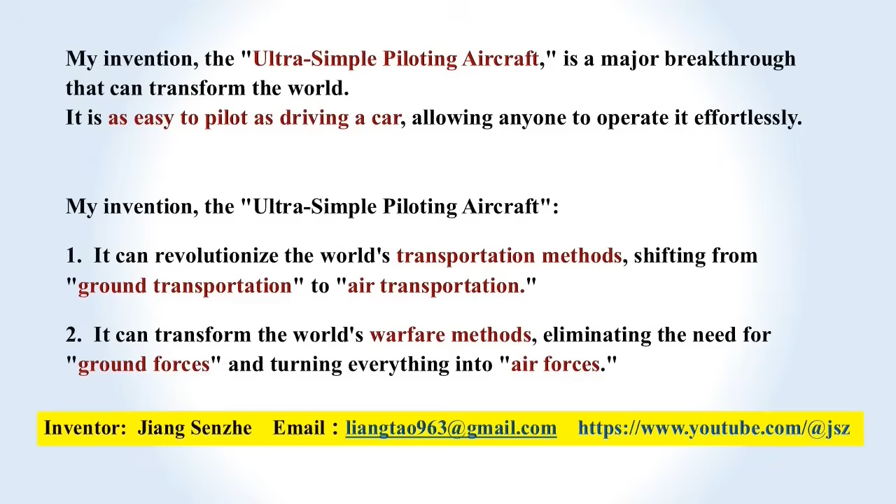My ultra-simple piloting aircraft is extremely simple to operate, just like driving a car, with only 3 controls: the steering wheel, accelerator pedal, and brake pedal.

The steering wheel controls the aircraft's left and right turns. The accelerator pedal controls the aircraft's up and down elevation.

Press the accelerator, and the aircraft ascends. Keep the accelerator steady, and the altitude remains constant. Release the accelerator, and the aircraft descends.

The brake pedal controls the brakes on the aircraft's ground wheels. This simple control method makes piloting the aircraft as easy as driving a car, making it an ultra-simple piloting aircraft that anyone can fly.

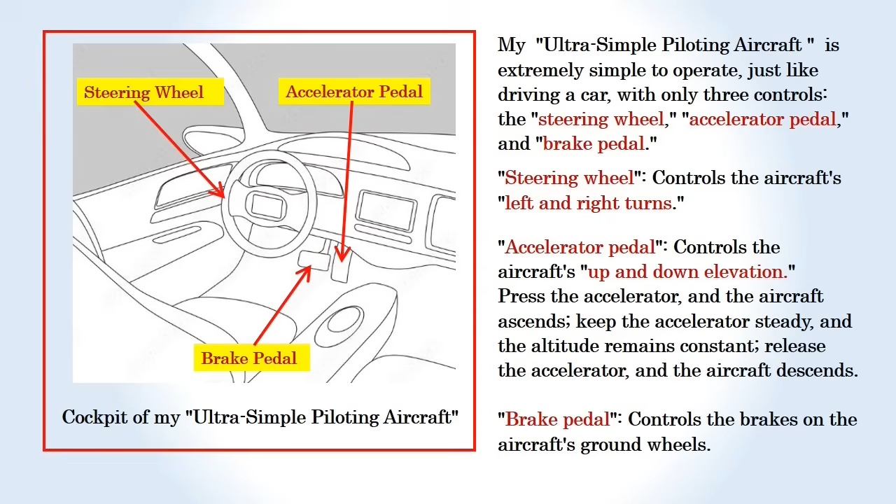This video program is divided into 3 parts.

Part 1: my invented ultra-simple piloting aircraft, which can change the world's transportation methods, shifting from ground transportation to air transportation. Part 2: my invented ultra-simple piloting aircraft, which can change the world's warfare methods, eliminating the need for ground forces and turning everything into air forces. Part 3: an introduction to the principles of my invented ultra-simple piloting aircraft.

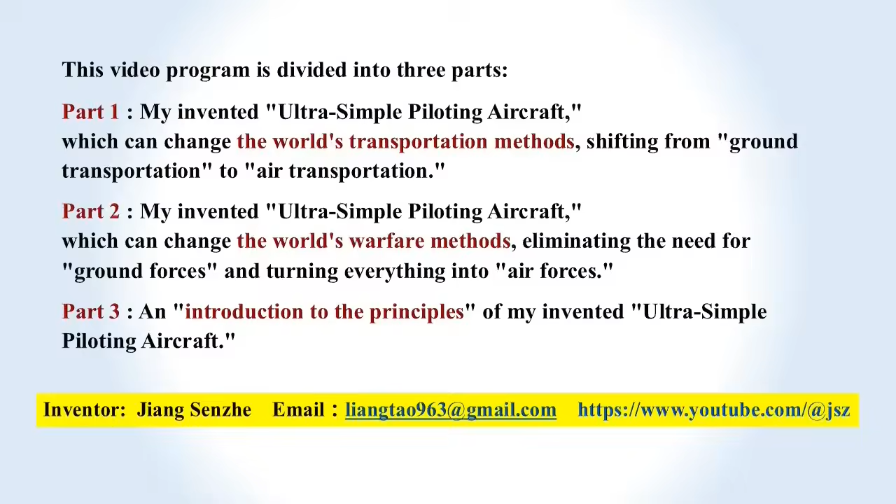First part: my invented ultra-simple piloting aircraft can change the world's transportation methods, shifting from ground transportation to air transportation.

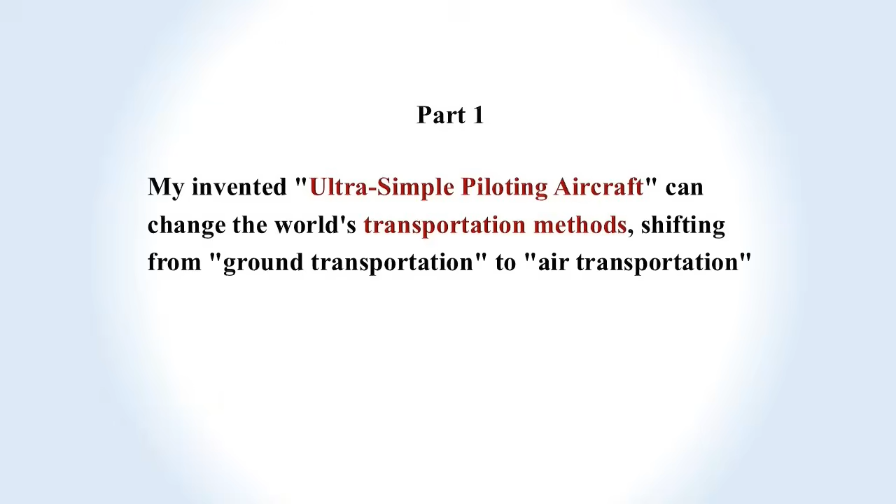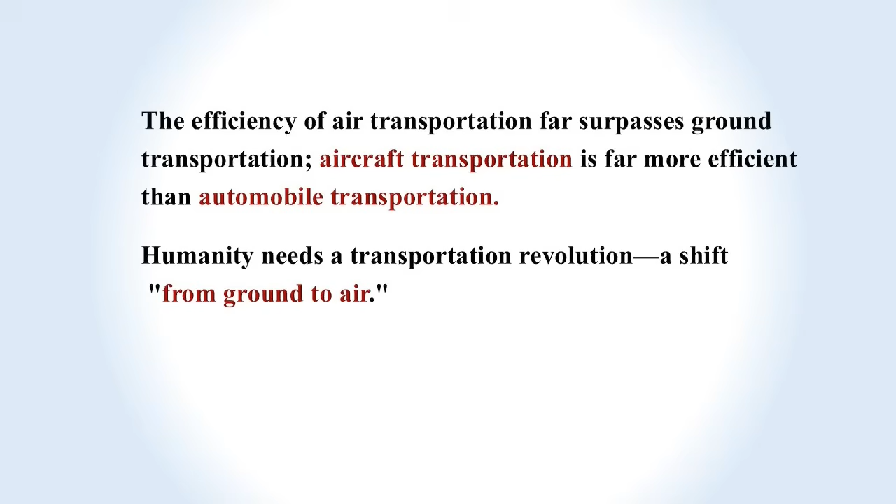The efficiency of air transportation far surpasses ground transportation. Aircraft transportation is far more efficient than automobile transportation. Humanity needs a transportation revolution, a shift from ground to air.

First, let's discuss the 6 major drawbacks of ground transportation. One: the infrastructure costs for ground roads are extremely high. Building a road connecting 2 cities may require bridges over rivers or tunnels through mountains, resulting in very high construction costs and long timelines.

Two: maintenance costs for ground roads are high. Roads aren't just built and forgotten, they require frequent repairs, which incur significant expenses.

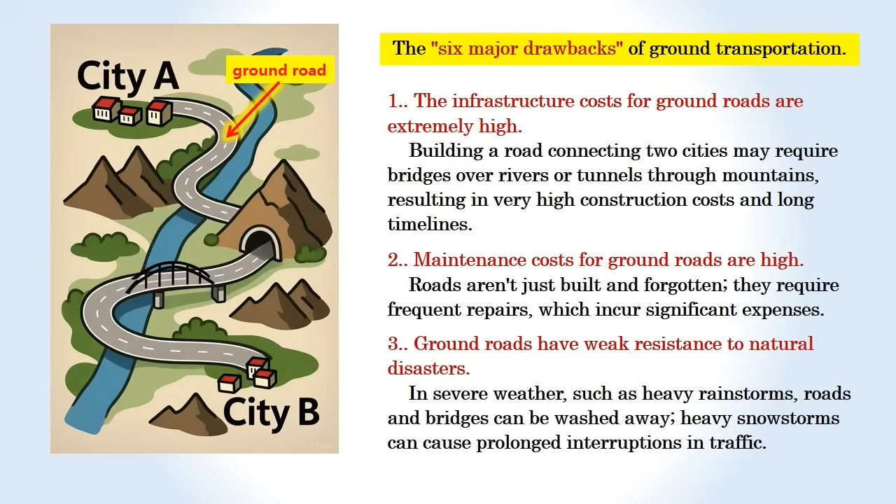Three: ground roads have weak resistance to natural disasters. In severe weather, such as heavy rainstorms, roads and bridges can be washed away. Heavy snowstorms can cause prolonged interruptions in traffic.

Four: ground traffic requires complex traffic signal systems. Ground traffic operates in one-dimensional space, where vehicles can only move forward and backward along roads, not freely left and right, let alone up and down.

At intersections in this one-dimensional space, complex traffic signals must halt vehicles from one direction temporarily. These signals force vehicles to stop frequently, greatly reducing travel speeds and increasing unnecessary fuel consumption. Additionally, the high cost of traffic signal systems further raises ground transportation expenses.

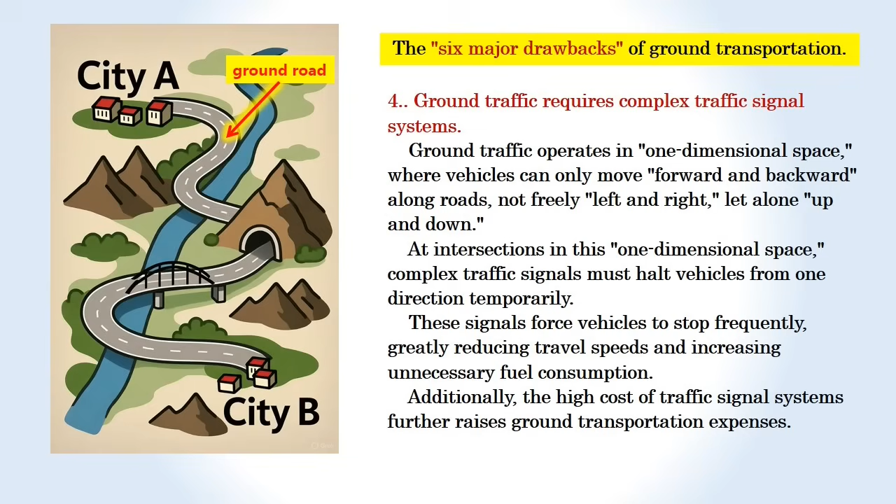Five: ground roads are prone to traffic jams, leading to uncertainty in transportation. Roads often experience long jams for various reasons, creating uncertainty in ground traffic and making it impossible to arrive precisely on schedule. Prolonged jams also cause significant economic losses.

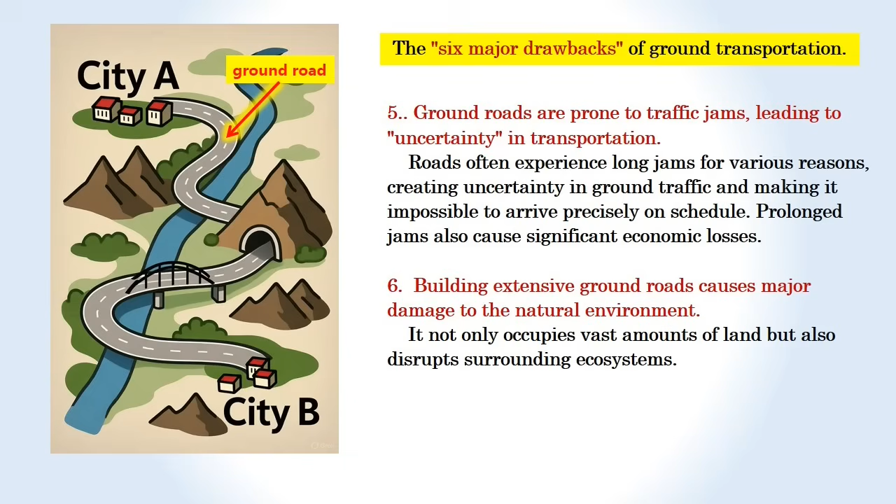Six: building extensive ground roads causes major damage to the natural environment. It not only occupies vast amounts of land but also disrupts surrounding ecosystems.

Air transportation can overcome these 6 major drawbacks of ground transportation. One: no need for massive road systems. Connecting 2 cities via air doesn't require roads, just build a few airports in each city, drastically reducing construction costs.

Two: no road maintenance fees. Air routes made of natural air require no repairs, only airports need maintenance, significantly lowering costs.

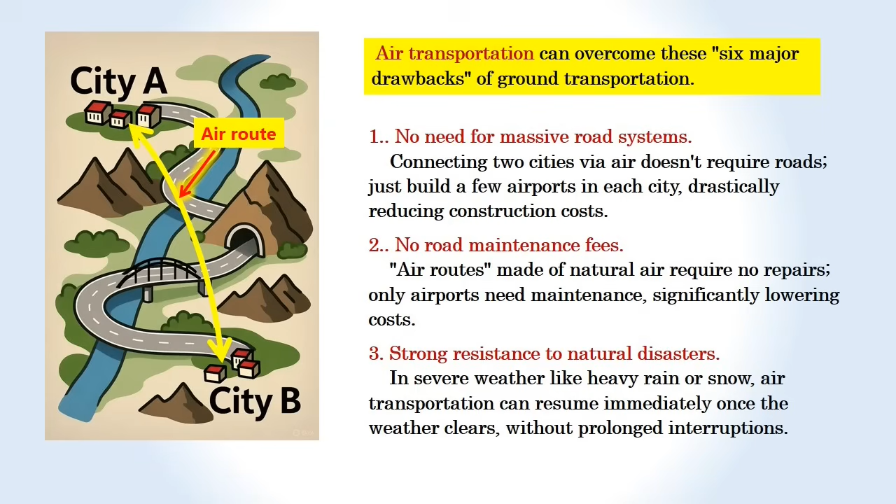Three: strong resistance to natural disasters. In severe weather like heavy rain or snow, air transportation can resume immediately once the weather clears, without prolonged interruptions.

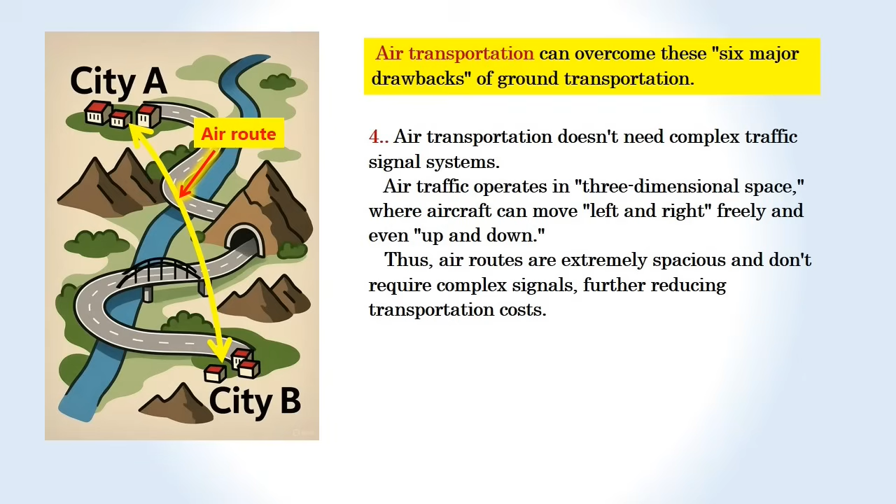Four: air transportation doesn't need complex traffic signal systems. Air traffic operates in 3-dimensional space, where aircraft can move left and right freely and even up and down. Thus, air routes are extremely spacious and don't require complex signals, further reducing transportation costs.

Five: no air route congestion, leading to high certainty in transportation. Without blockages, air traffic is highly predictable, allowing precise on-time arrivals.

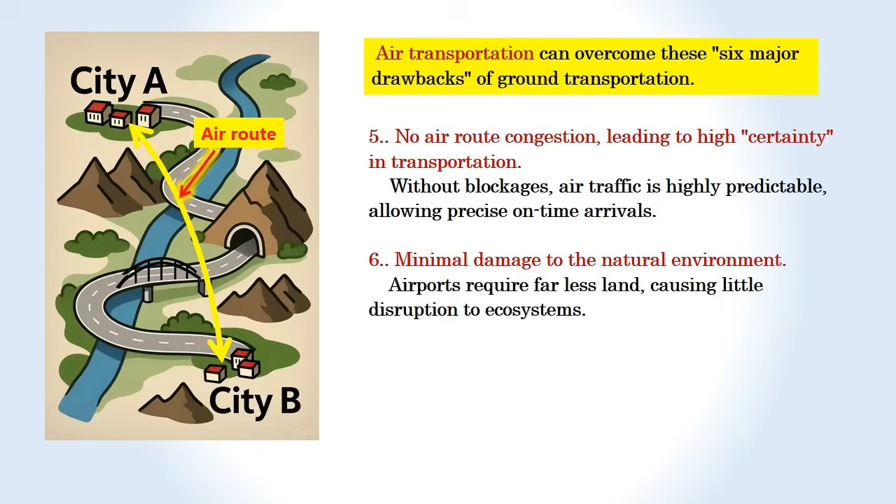Six: minimal damage to the natural environment. Airports require far less land, causing little disruption to ecosystems.

First advantage of air transportation: it greatly reduces transportation costs compared to ground transportation. Many people think aircraft consume more fuel than cars, but this overlooks the hidden costs of ground transportation, which include not just vehicle fuel but also road construction. Roads are extremely expensive, especially with tunnels and bridges, and they also require costly traffic control systems plus high maintenance for both.

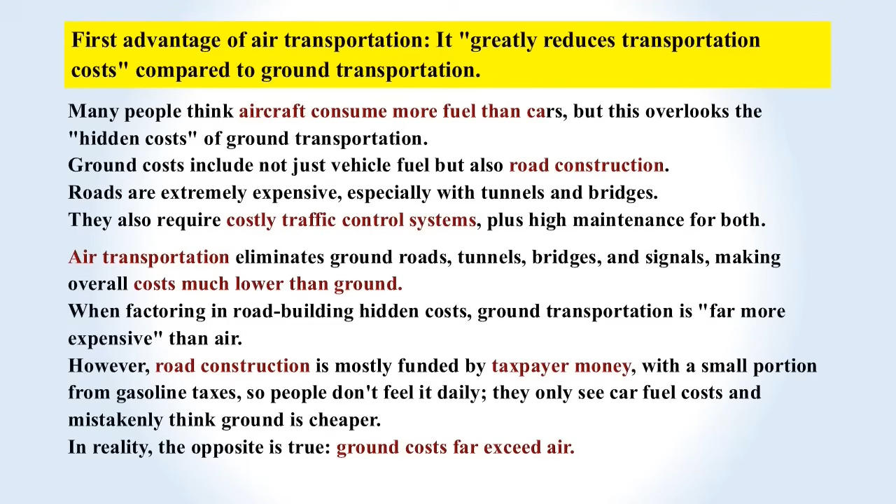Air transportation eliminates ground roads, tunnels, bridges, and signals, making overall costs much lower than ground. When factoring in road building hidden costs, ground transportation is far more expensive than air. However, road construction is mostly funded by taxpayer money, with a small portion from gasoline taxes, so people don't feel it daily, they only see car fuel costs and mistakenly think ground is cheaper. In reality, the opposite is true, ground costs far exceed air.

Second advantage of air transportation: it is faster than ground. First reason for air's speed: ground roads are winding, while air routes are straight. Ground roads between cities often curve to avoid obstacles, lengthening distances. Air routes have no obstacles, so they can be straight, shortening distances and naturally increasing speed.

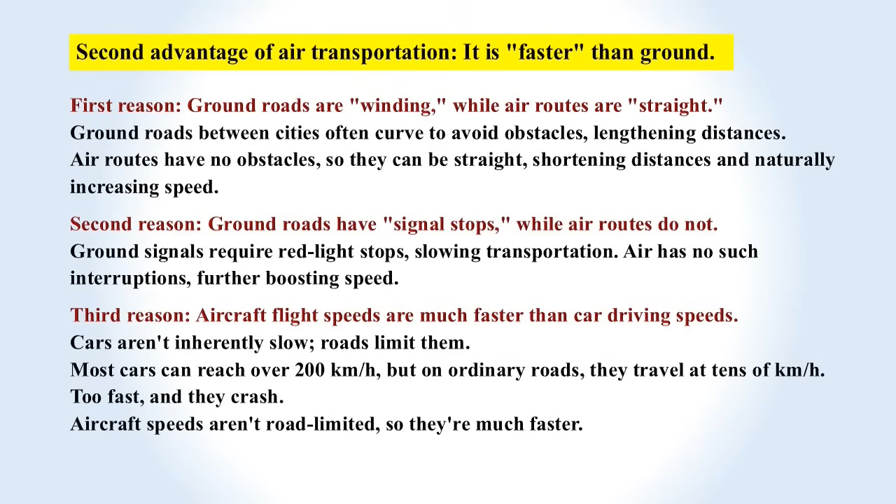Second reason, ground roads have signal stops, while air routes do not. Ground signals require red light stops, slowing transportation. Air has no such interruptions, further boosting speed. Third reason, aircraft flight speeds are much faster than car driving speeds. Cars aren't inherently slow, roads limit them. Most cars can reach over 200 km/h, but on ordinary roads they travel at tens of km/h, too fast and they crash. Aircraft speeds aren't road limited, so they're much faster.

Third advantage of air transportation: it is more precise than ground. Modern society demands increasing precision in transportation, like in express delivery. Ground is affected by signals and jams, making precision hard. Air has no signals or jams, enabling easy precision.

Fourth advantage, air has stronger disaster resistance than ground. Ground has weak resistance to disasters: heavy rain washes away roads, snow causes long interruptions. Air resumes quickly after weather clears, without prolonged halts.

Fifth advantage, air causes less environmental damage than ground. Ground systems cause major ecosystem harm, occupying vast land and inflicting permanent damage. Air needs no massive roads, airports use little land, minimizing impact.

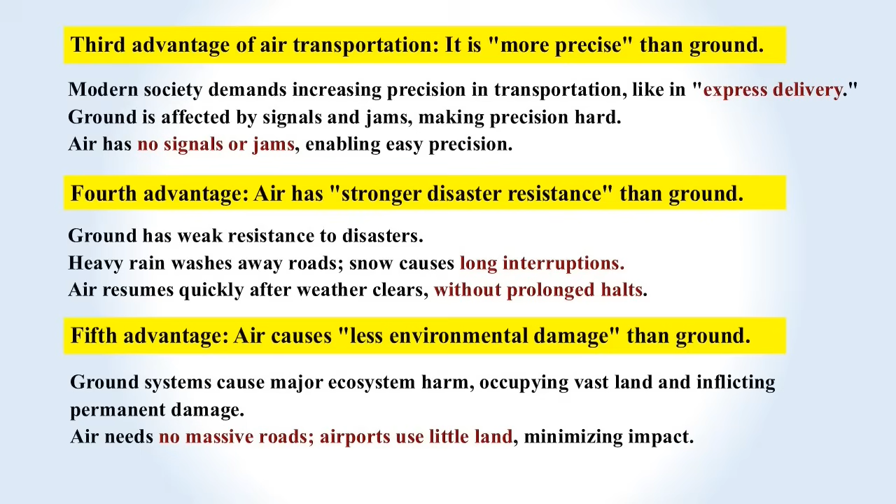Finally, summarizing the advantages of air transportation: 1. Air greatly reduces transportation costs compared to ground. 2. Air is faster than ground. 3. Air is more precise than ground. 4. Air has stronger disaster resistance than ground. 5. Air causes less environmental damage than ground. Therefore, air transportation efficiency far surpasses ground, aircraft efficiency far exceeds automobiles. Humanity needs a transportation revolution, a shift from ground to air.

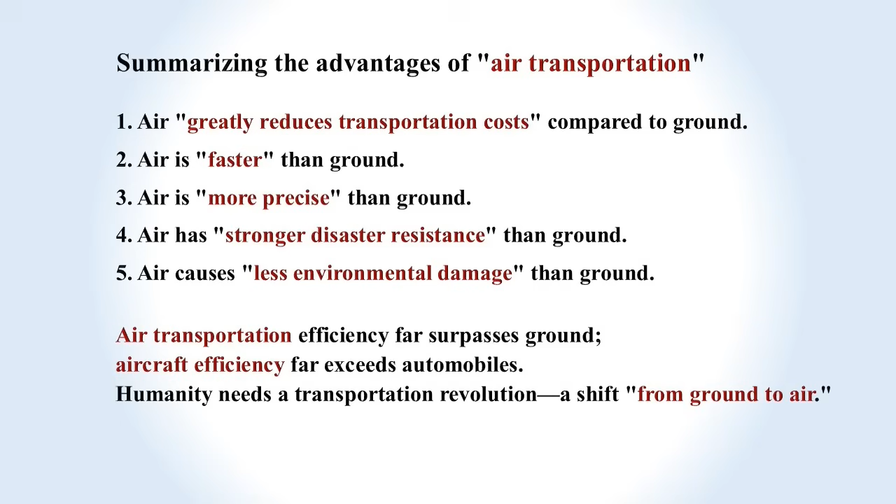The biggest obstacle to widespread air transportation is that current aircraft are very complex to pilot, requiring specialized pilot training. If piloting were as simple as driving a car, making it so anyone can fly, widespread adoption would be much easier. My invented ultra-simple piloting aircraft is extremely simple to pilot, anyone can fly. It can enable widespread air transportation and achieve the revolution from ground to air.

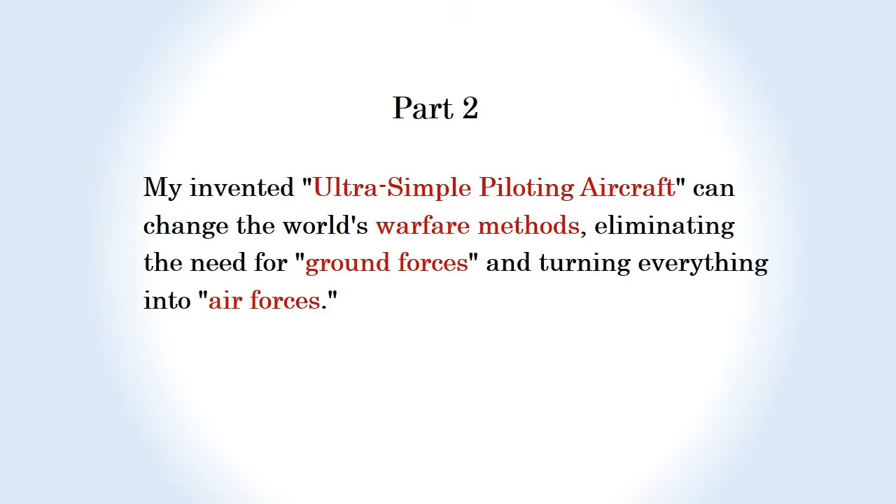Second part: my invented ultra-simple piloting aircraft can change the world's warfare methods, eliminating the need for ground forces and turning everything into air forces. This is an epoch-making invention that can transform global warfare. It is as easy to pilot as driving a car, allowing anyone to operate it effortlessly. Thus, all military soldiers can become pilots, ground forces will disappear, and everything will become air forces.

As early as World War II, air weapons proved more effective than ground ones; ground weapons were no match for air. In the Russia-Ukraine war, tanks on both sides were mostly destroyed not by opposing tanks but by aerial drones. To counter drone attacks, Russia invented the Tsar-Mangal tank, wrapping tanks in iron sheets or nets so drones explode prematurely on the outer layer, protecting the tank body. But Tsar-Mangal tanks aren't safe either, opposing drones aren't limited to one: the first destroys the net, and the second penetrates to destroy the tank.

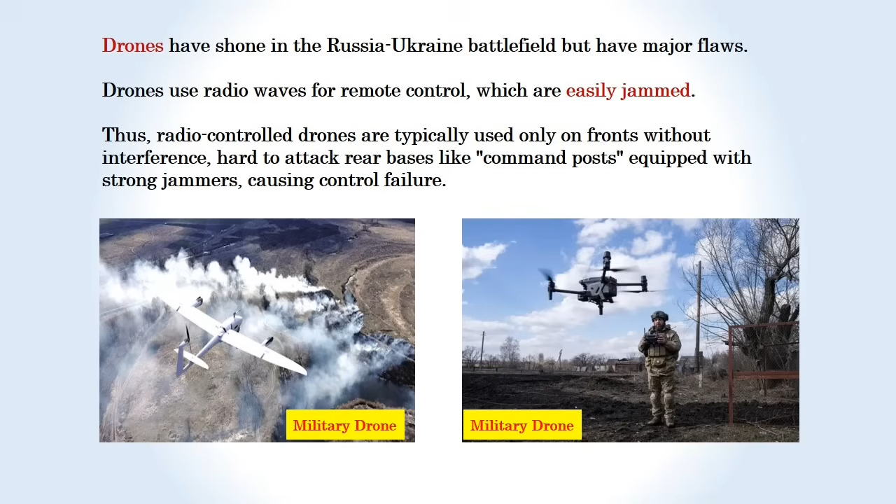Drones have shown promise on the Russia-Ukraine battlefield but have major flaws. Drones use radio waves for remote control, which are easily jammed. Thus, radio-controlled drones are typically used only on fronts without interference, and are hard to use to attack rear bases like command posts equipped with strong jammers, which cause control failure.

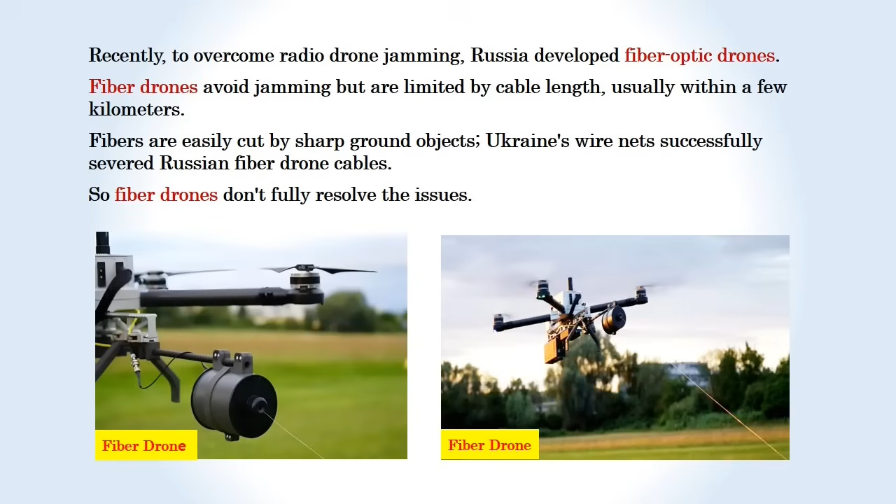Recently, to overcome radio drone jamming, Russia developed fiber optic controlled drones. Fiber drones avoid jamming but are limited by cable length, usually within a few kilometers. Fibers are easily cut by sharp ground objects. Ukraine's wire net successfully severed Russian fiber drone cables. So fiber drones don't fully resolve the issues.

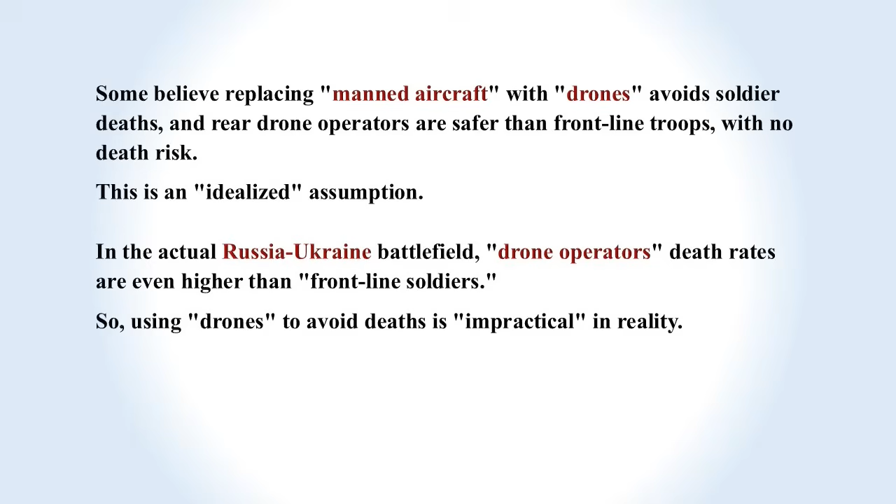Some believe replacing manned aircraft with drones avoids soldier deaths, since rear drone operators are safer than front-line troops, with no death risk. This is an idealized assumption. In the actual Russia-Ukraine battlefield, drone operators' death rates are even higher than front-line soldiers. So using drones to avoid deaths is impractical in reality.

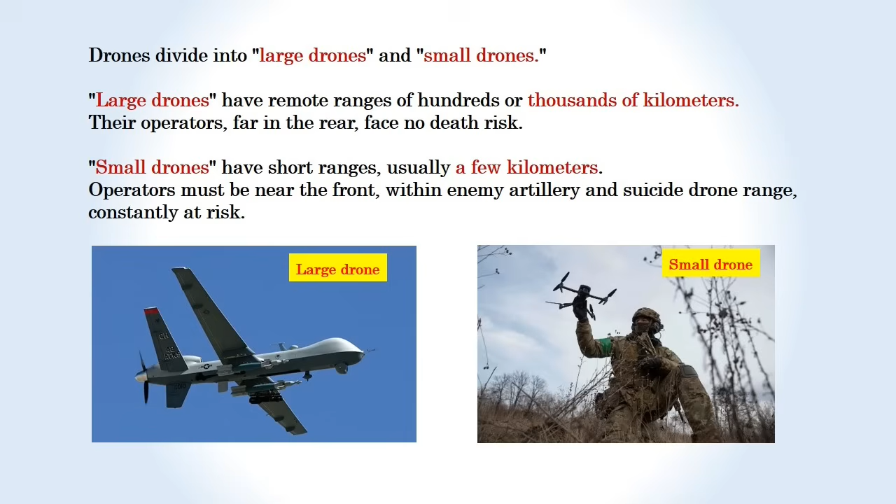Drones divide into large drones and small drones. Large drones have remote ranges of hundreds or thousands of kilometers, and their operators, far in the rear, face no death risk. Small drones have short ranges, usually a few kilometers. Operators must be near the front, within enemy artillery and suicide drone range, constantly at risk.

Large drones can be controlled from afar, safe for operators. But they're used only against foes lacking air defenses, like US MQ-9 Reapers carrying ground attack missiles, which assassinated Iranian leader Soleimani in Iraq. In real battles like Russia-Ukraine, both sides have strong air defenses. Large drones are easily radar detected and shot down by missiles, becoming sitting ducks.

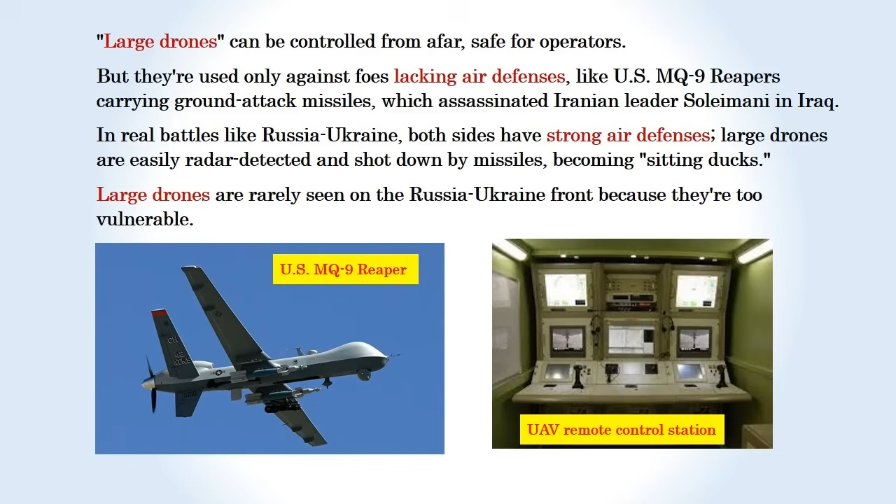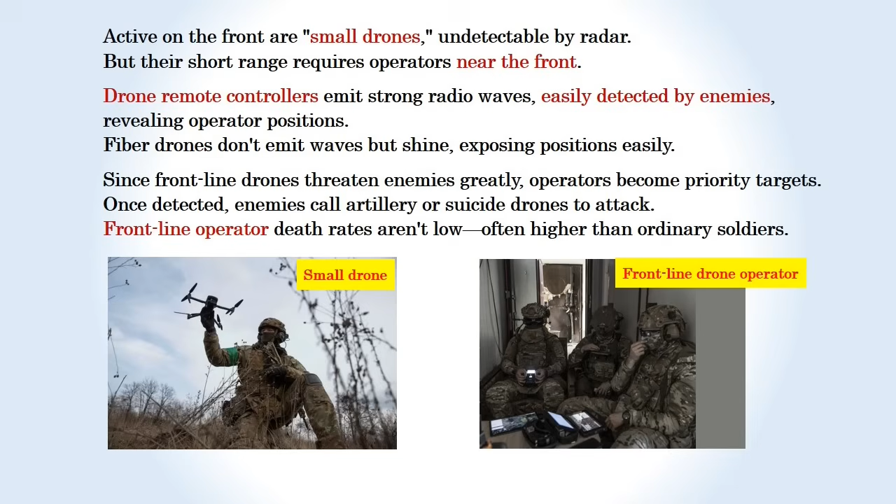Active on the front are small drones, undetectable by radar, but their short range requires operators near the front. Drone remote controllers emit strong radio waves, easily detected by enemies, revealing operator positions. Fiber drones don't emit waves but shine, exposing positions easily. Since front-line drones threaten enemies greatly, operators become priority targets. Once detected, enemies call artillery or suicide drones to attack. Front-line operator death rates aren't low, often higher than ordinary soldiers.

Thus, assuming drones avoid deaths is impractical. The most reliable battlefield weapon remains manned aircraft. But why are manned fighters rare on the Russia-Ukraine front?

Mainly because both sides have few aircraft and can't afford losses. Ukraine has only dozens, Russia hundreds. Both have lost hundreds of tanks and armored vehicles, but with thousands in stock, they can absorb it. With few aircraft, they preserve them for critical moments.

Why so few aircraft? First, modern fighters are too complex and expensive. An F-16 costs $20 million, such costly weapons can't be mass-produced.

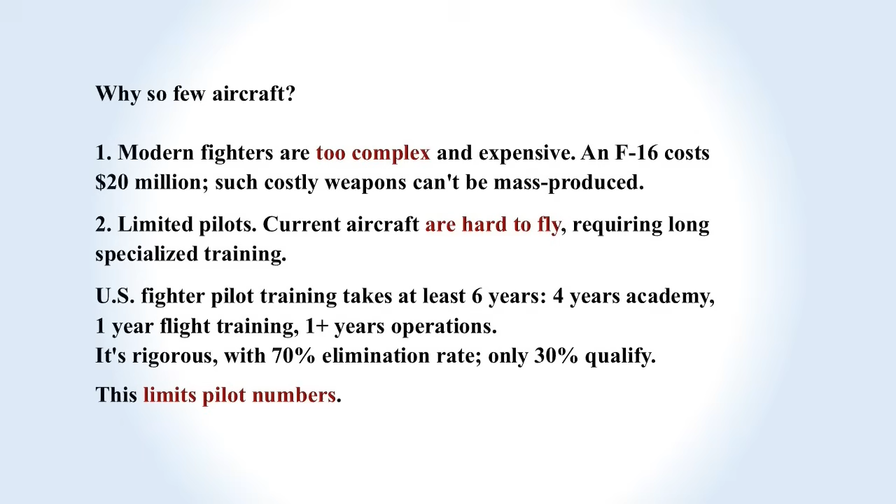Second, limited pilots. Current aircraft are hard to fly, requiring long specialized training. US fighter pilot training takes at least 6 years: 4 years academy, 1 year flight training, 1+ years operations. It's rigorous, with a 70% elimination rate, only 30% qualify. This limits pilot numbers.

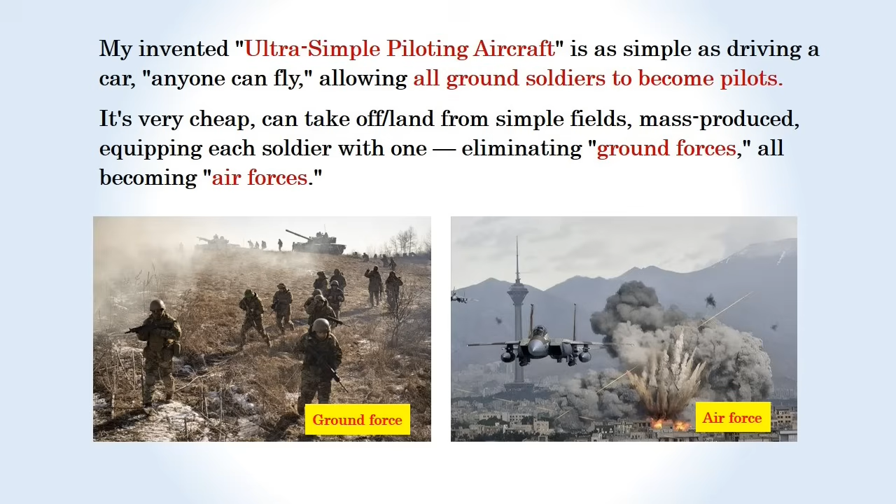My invented ultra-simple piloting aircraft is as simple as driving a car. Anyone can fly it, allowing all ground soldiers to become pilots. It's very cheap, can take off and land from simple fields, mass-produced, equipping each soldier with one, eliminating ground forces, all becoming air forces.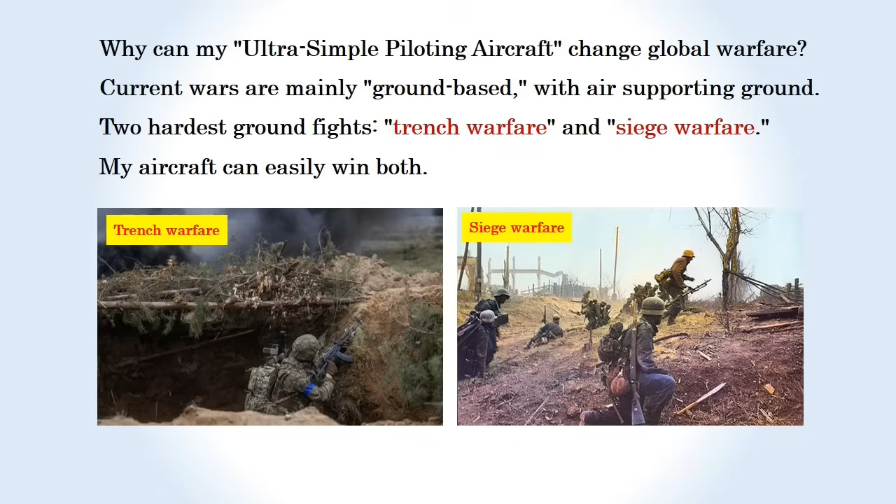Why can my ultra-simple piloting aircraft change global warfare? Current wars are mainly ground-based, with air supporting ground. The two hardest ground fights are trench warfare and siege warfare. My aircraft can easily win both.

This Russia-Ukraine photo shows typical trench warfare: a central trench, surrounded by craters blasted by enemy shells. Defenders hide in trenches, surrounded by mines. When enemies approach, they fire from trenches to repel them. Attackers first bombard with artillery to weaken defenses, then lead with tanks, infantry following, to charge and capture.

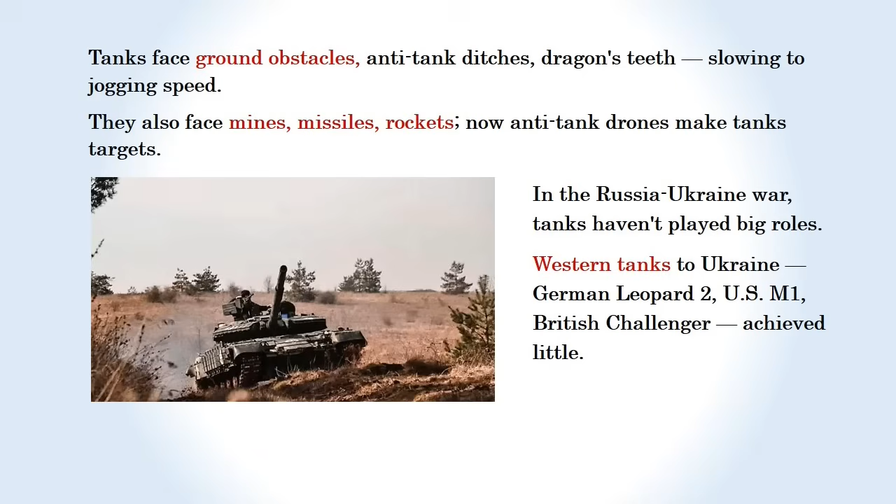Tanks face ground obstacles, anti-tank ditches, dragon's teeth, slowing to jogging speed. They also face mines, missiles, rockets, and now anti-tank drones make tanks targets. In the Russia-Ukraine war, tanks haven't played big roles. Western tanks sent to Ukraine, like the German Leopard 2, US M1, and British Challenger, achieved little.

My ultra-simple piloting aircraft can easily win trench warfare. Send hundreds of soldiers in hundreds of aircraft to attack trench enemies. Ground obstacles, ditches, teeth, mines, all become useless. Aircraft speed quickly reaches overhead, dropping bombs into trenches.

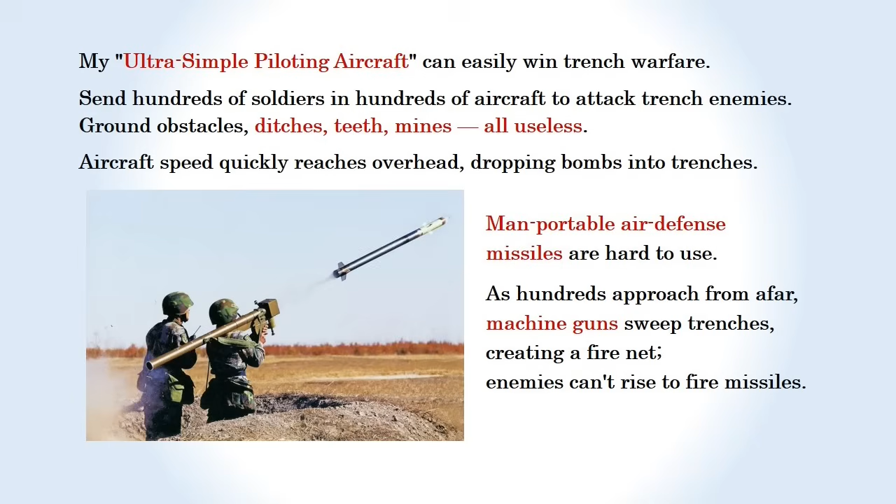Man-portable air defense missiles are hard to use as hundreds of aircraft approach from afar. Machine guns sweep trenches, creating a fire net. Enemies can't rise to fire missiles.

In summary, my ultra-simple piloting aircraft can easily win trench warfare.

My ultra-simple piloting aircraft can also easily win siege warfare. Capturing a defended city needs massive forces, tens to hundreds of thousands. Before, this required mass troop assembly in the rear, mobilizing from afar, then attacking.

The Russia-Ukraine war offers insights on siege warfare. This war has no large formation combat, mostly small scale, dozens to hundreds, not thousands or tens of thousands like World War II. Why? The key is that advanced long-range weapons prevent large troop assemblies.

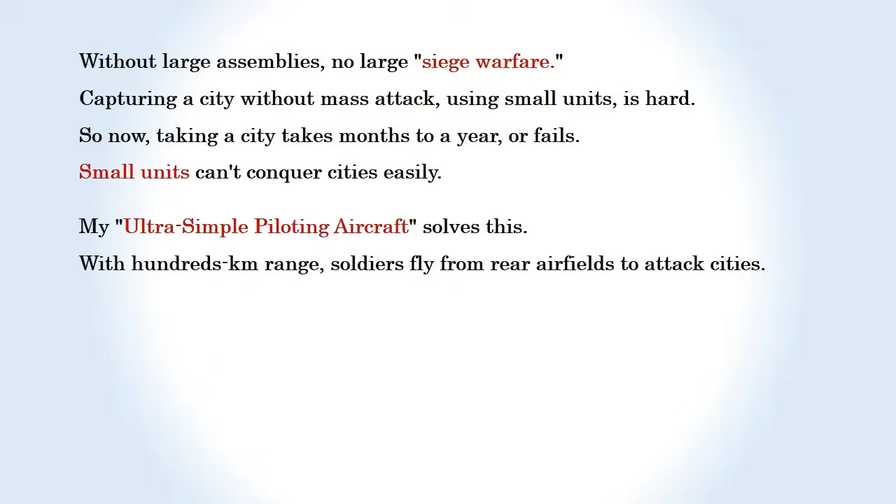For example, deploy 100,000 soldiers, each in one aircraft, attacking a city. They don't concentrate at one field, but disperse from many and jointly attack. Short takeoff and landing allows simple fields or highways.

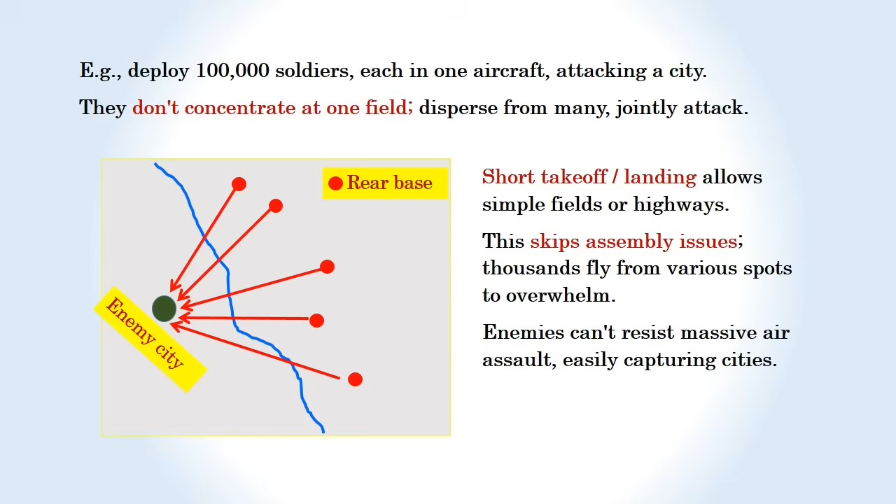This skips assembly issues, as thousands fly from various spots to overwhelm the enemy. Enemies can't resist a massive air assault, making cities easy to capture. In summary, my ultra-simple piloting aircraft can easily win siege warfare.

Most importantly, my ultra-simple piloting aircraft can eliminate ground forces, retaining only air forces. It lets air forces replace ground forces entirely, no need for ground anymore.

In the past, air forces couldn't replace ground forces because there were too few aircraft. The U.S. Air Force has approximately 5,500 manned aircraft, including 2,000 fighters. Too few to fully capture enemy positions, so a large ground army is still needed.

The U.S. Army has approximately 500,000 soldiers. Equip each with an aircraft, and it will become an air force with 500,000 aircraft. This can destroy enemy ground forces from the air, eliminating the need for ground troops, saving on tanks, armor, artillery, anti-tank weapons, and mines, reducing military spending.

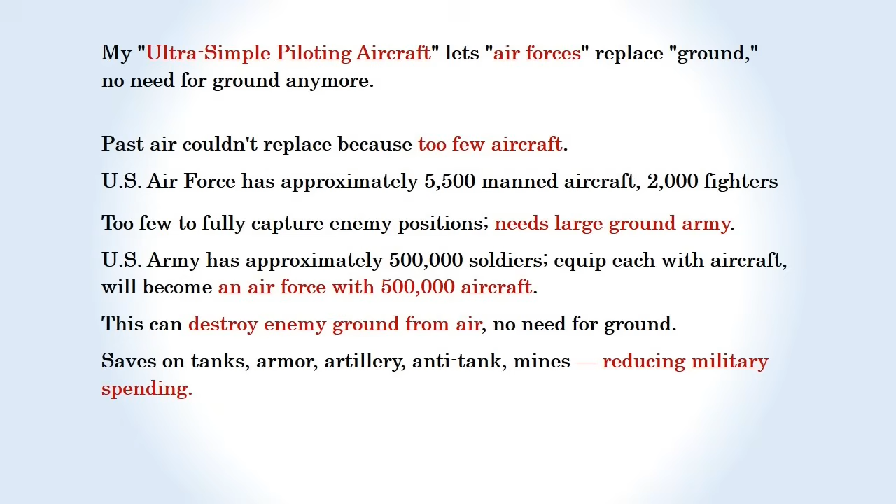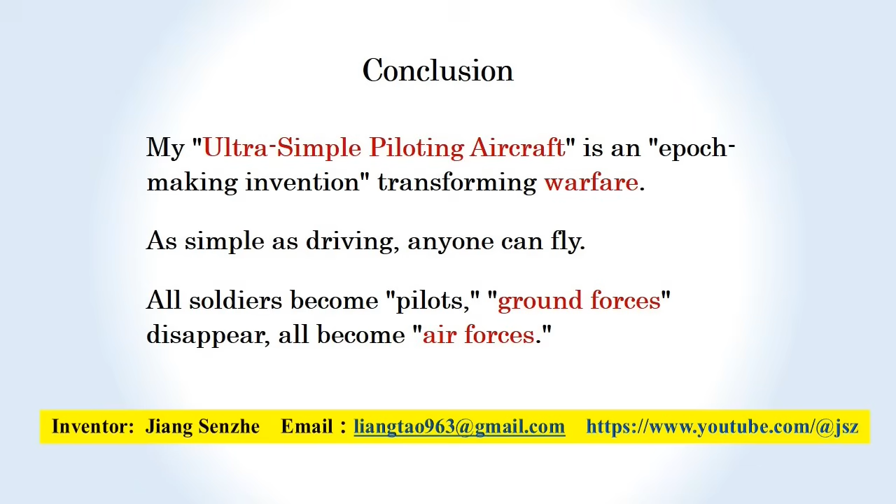In conclusion, my ultra-simple piloting aircraft is an epoch-making invention transforming warfare. As simple as driving, anyone can fly it. All soldiers become pilots, ground forces disappear, and all become air forces.

Third part: Introduction to the principles of my invented ultra-simple piloting aircraft.

Why can my ultra-simple piloting aircraft be operated by anyone? Let us first examine why current aircraft are so challenging to fly. The primary reason current aircraft are difficult to operate is the frequent need to adjust the aircraft's tilt, or pitch angle, during flight.

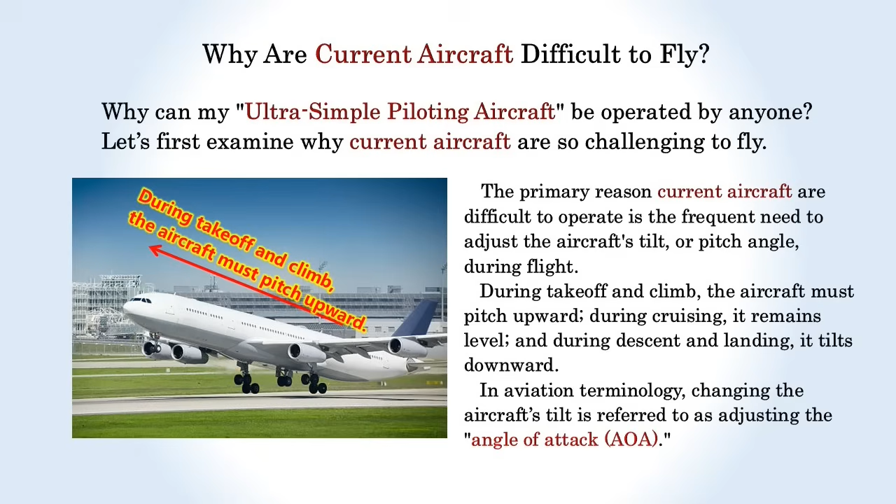During takeoff and climb, the aircraft must pitch upward; during cruising, it remains level; and during descent and landing, it tilts downward. In aviation terminology, changing the aircraft's tilt is referred to as adjusting the angle of attack.

Adjusting the angle of attack requires advanced piloting skills. If mishandled, an excessively large angle of attack can cause the aircraft to lose control and enter a stall. Once stalled, the aircraft becomes extremely difficult to control, rapidly descending and potentially leading to catastrophic crashes. Recovering from a stall requires exceptional piloting skills to restore normal flight.

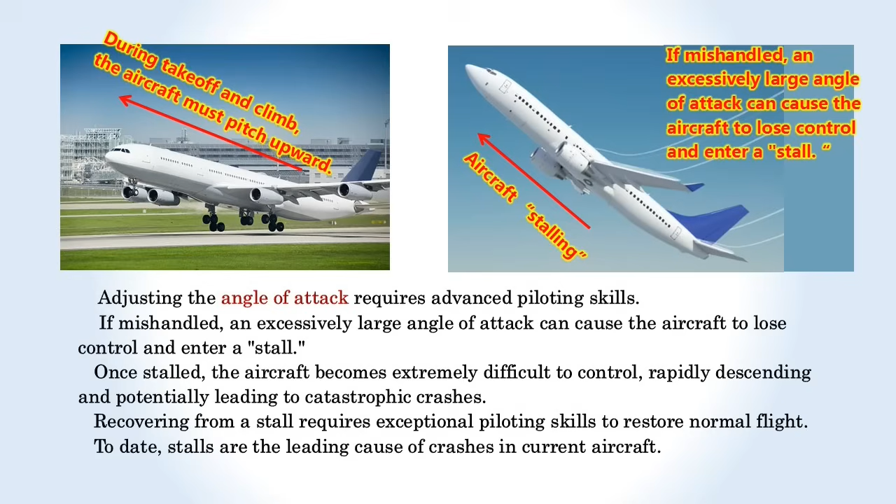To date, stalls are the leading cause of crashes in current aircraft.

Current aircraft require frequent angle of attack adjustments during takeoff, climb, cruising, descent, and landing, making operations highly complex. Precise control is needed to adjust the angle of attack, demanding rigorous training. Moreover, during these adjustments, a slight miscalculation can result in an excessive angle of attack, triggering a stall. A stall is extremely dangerous and can easily lead to a crash, resulting in loss of life.

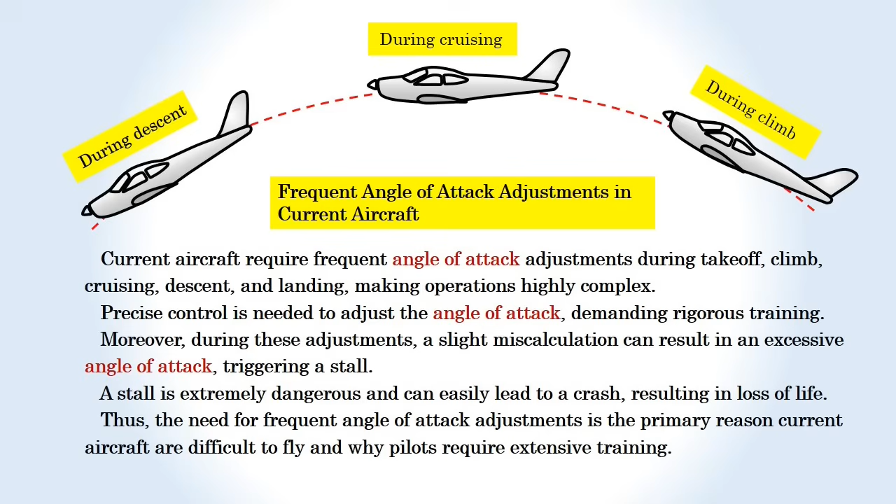Thus, the need for frequent angle of attack adjustments is the primary reason current aircraft are difficult to fly and why pilots require extensive training.

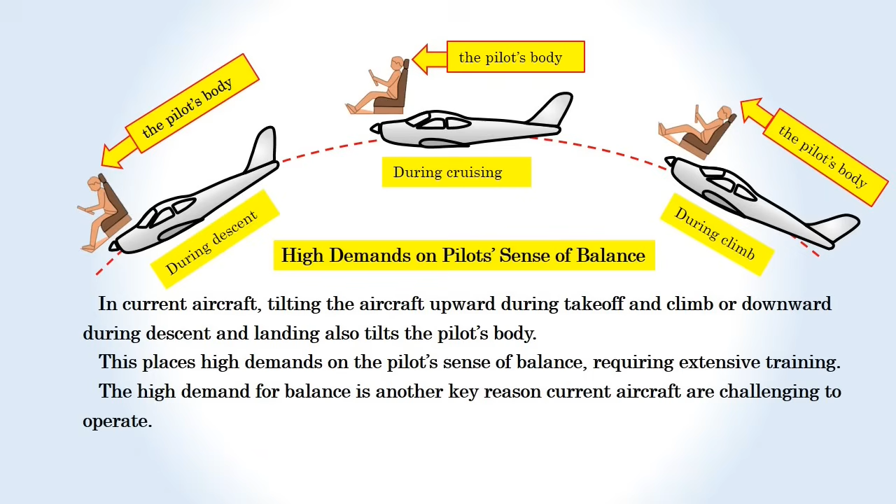In current aircraft, tilting the aircraft upward during takeoff and climb, or downward during descent and landing, also tilts the pilot's body. This places high demands on the pilot's sense of balance, requiring extensive training. The high demand for balance is another key reason current aircraft are challenging to operate.

The key feature of my new aircraft is that it has two pairs of main wings. Current aircraft have one pair of main wings located at the center of the fuselage. My new aircraft has two pairs of main wings positioned at the front and rear of the fuselage.

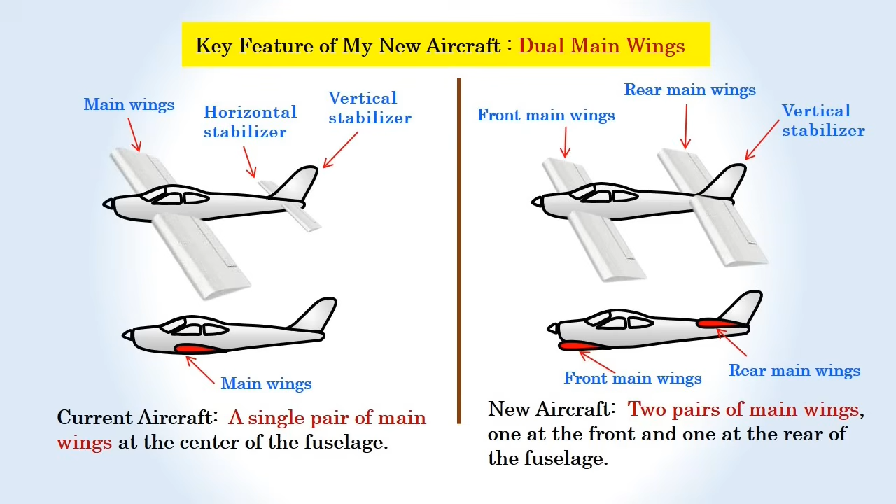Current aircraft rely on a single pair of wings for lift, similar to a unicycle, which is unstable in the fore-aft direction and difficult to control. Operating a current aircraft is as challenging as riding a unicycle, requiring special training and limiting its accessibility to a small group of trained pilots.

My new aircraft, with two pairs of wings, is akin to a bicycle, offering fore-aft stability and simple operation. Flying my aircraft is as easy as riding a bicycle, requiring no special training and accessible to most people.

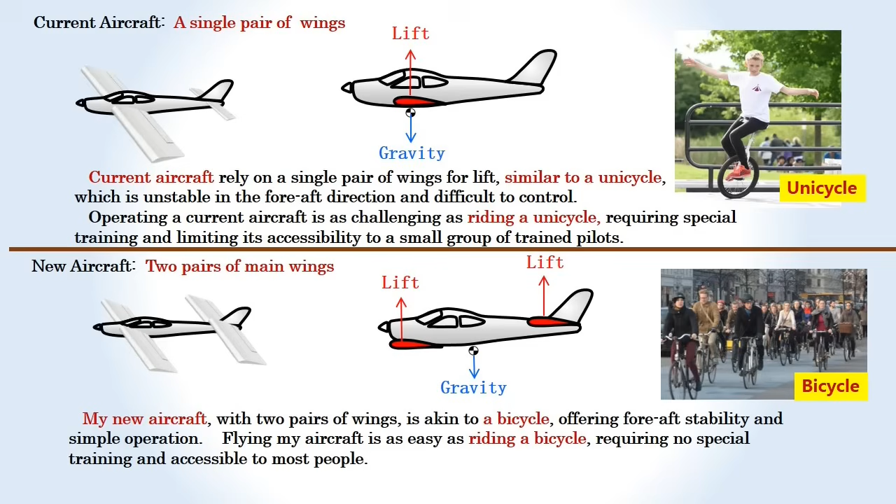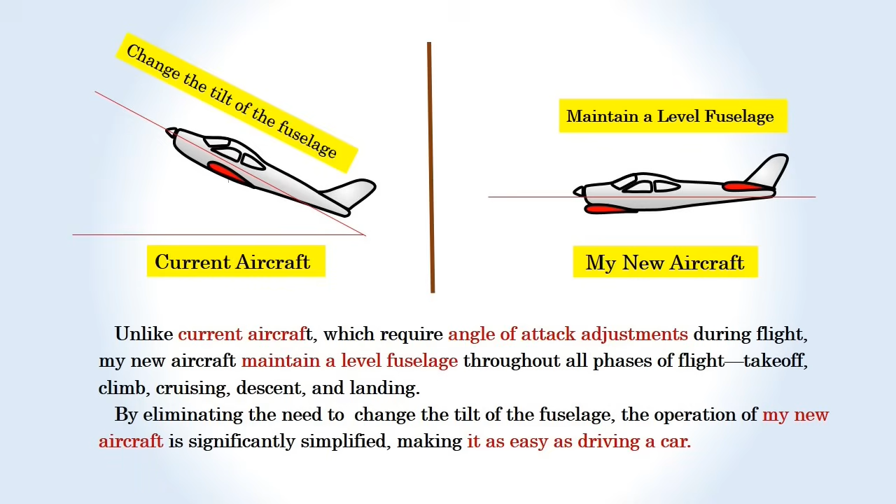Unlike current aircraft, which require angle of attack adjustments during flight, my new aircraft maintains a level fuselage throughout all phases of flight: takeoff, climb, cruising, descent, and landing. By eliminating the need to change the tilt of the fuselage, the operation of my new aircraft is significantly simplified, making it as easy as driving a car.

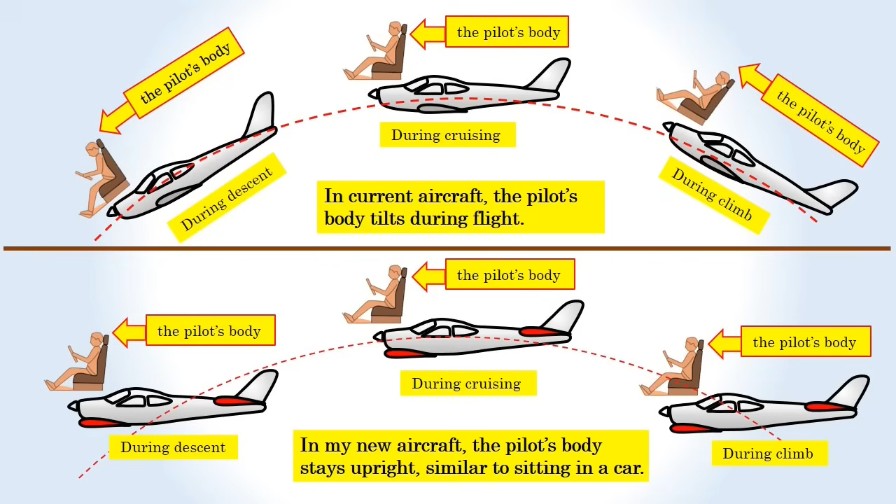In current aircraft, the pilot's body tilts during flight. In my new aircraft, the pilot's body stays upright, similar to sitting in a car.

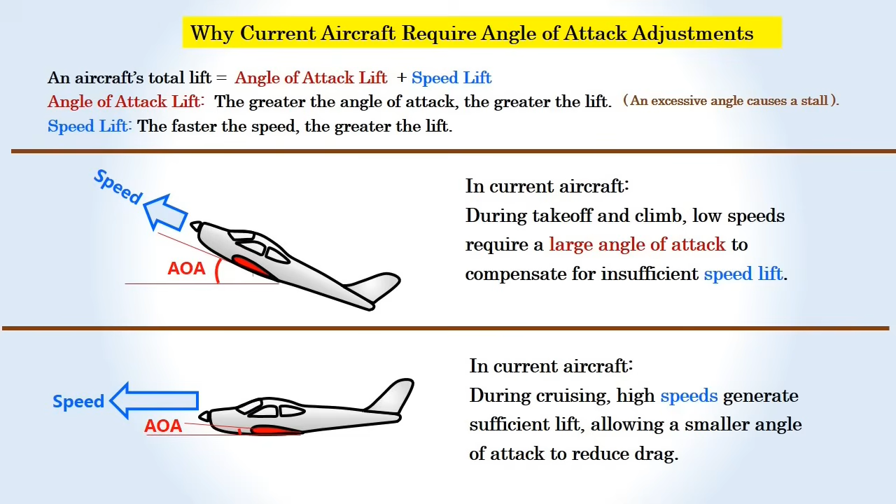Here's why current aircraft need angle changes, explained simply. The total lift of an aircraft equals angle of attack lift plus speed lift. Angle of attack lift increases as the angle of attack increases, but excessive angle of attack causes a stall. Speed lift increases as airspeed increases. In current aircraft, during takeoff and climb, low speeds require a large angle of attack to compensate for insufficient speed lift. During cruising, high speeds generate sufficient lift, allowing a smaller angle of attack to reduce drag.

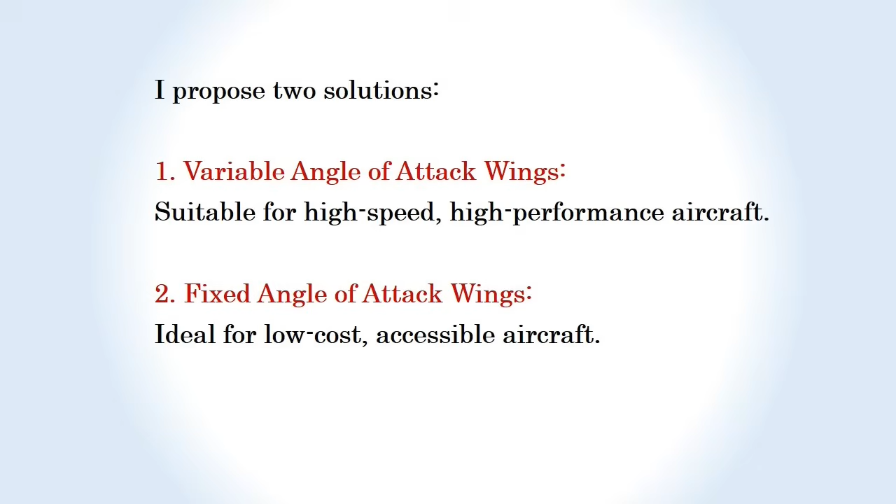My new aircraft addresses the need to alter the angle of attack in current aircraft. I propose two solutions. Solution 1: employ variable angle wings, suitable for high-speed, high-performance aircraft. Solution 2: employ fixed-angle wings, ideal for low-cost, accessible aircraft.

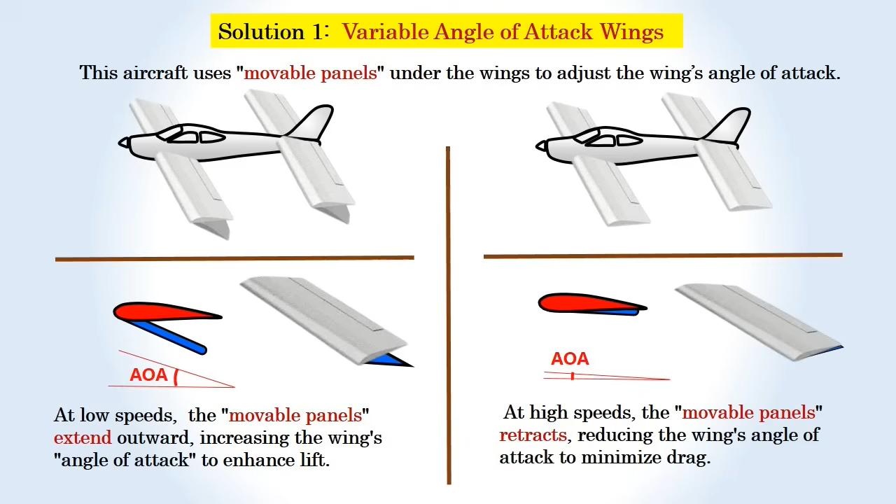This explains the principle behind a new aircraft featuring variable angle wings. This aircraft uses movable panels under the wings to adjust the wing's angle of attack. At low speeds, the movable panels extend outward, increasing the wing's angle of attack to enhance lift. At high speeds, the movable panels retract, reducing the wing's angle of attack to minimize drag.

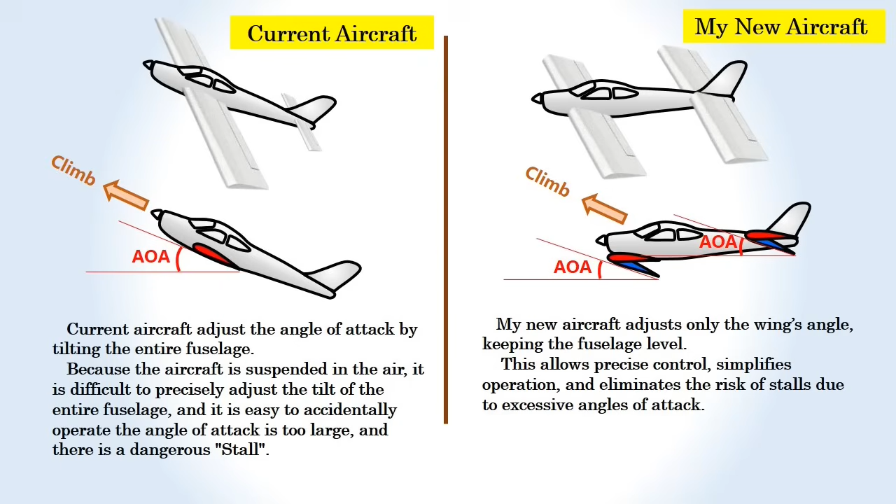Current aircraft adjust the angle of attack by tilting the entire fuselage. Because the aircraft is suspended in the air, it is difficult to precisely adjust the tilt of the entire fuselage, and it is easy to accidentally operate with too large an angle of attack, causing a dangerous stall. My new aircraft adjusts only the wing's angle, keeping the fuselage level. This allows precise control, simplifies operation, and eliminates the risk of stalls due to excessive angles of attack.

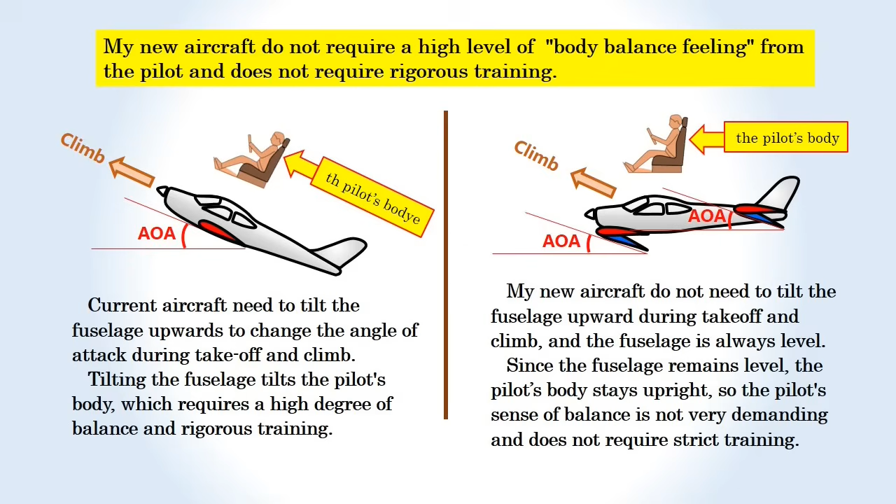Current aircraft need to tilt the fuselage upwards to change the angle of attack during takeoff and climb. Tilting the fuselage tilts the pilot's body, which requires a high degree of balance and rigorous training. My new aircraft does not need to tilt the fuselage upward during takeoff and climb; the fuselage is always level. Since the fuselage remains level, the pilot's body stays upright, so the pilot's sense of balance is not very demanding and does not require strict training.

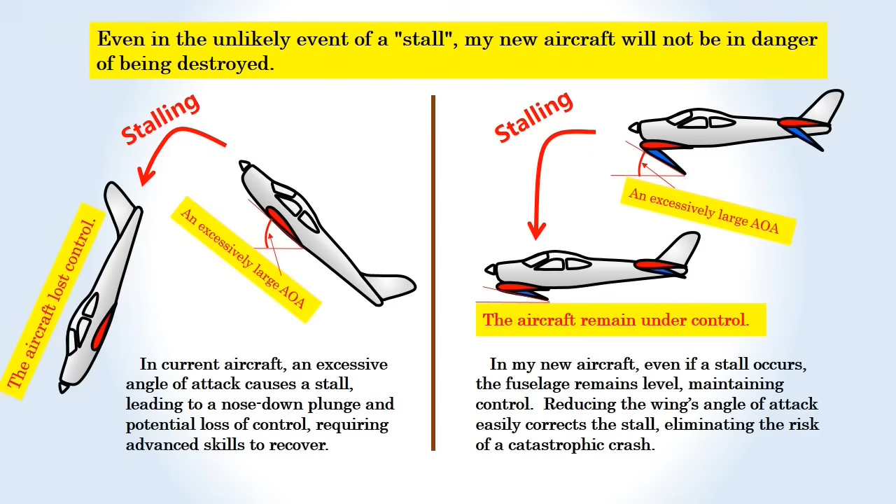In current aircraft, an excessive angle of attack causes a stall, leading to a nose-down plunge and potential loss of control, requiring advanced skills to recover. In my new aircraft, even if a stall occurs, the fuselage remains level, maintaining control. Reducing the wing's angle of attack easily corrects the stall, eliminating the risk of a catastrophic crash.

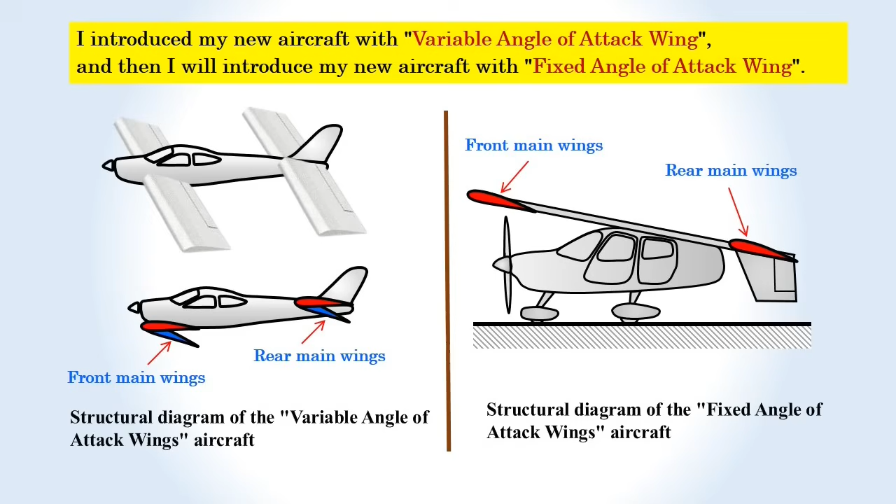I introduced my new aircraft with variable angle of attack wing, and now I will introduce my new aircraft with fixed angle of attack wing. These two schematic diagrams illustrate the principles of the new aircraft with variable angle wings and the new aircraft with fixed angle wings. The new aircraft with variable angle wings adjusts the wing's angle of attack as needed during flight.

The new aircraft with fixed angle wings maintains a constant wing angle of attack throughout flight. This explains the principle of flight of my new aircraft with fixed angle of attack wing. The total lift of an aircraft equals angle of attack lift plus speed lift. Angle of attack lift increases as the angle of attack increases. Speed lift increases as airspeed increases. My new aircraft with fixed angle of attack wing has a fixed angle of attack, so the angle of attack lift is constant.

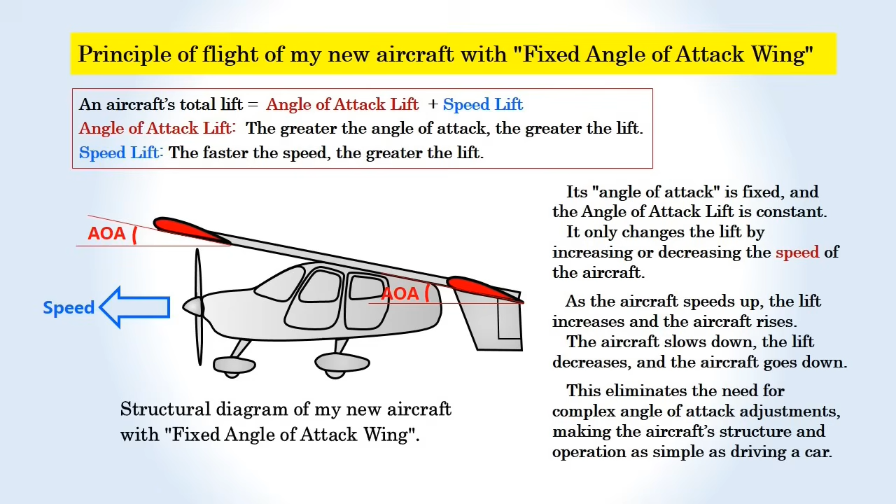It only changes the lift by increasing or decreasing the speed of the aircraft. As the aircraft speeds up, the lift increases and the aircraft rises. As the aircraft slows down, the lift decreases and the aircraft goes down. This eliminates the need for complex angle of attack adjustments, making the aircraft's structure and operation as simple as driving a car.

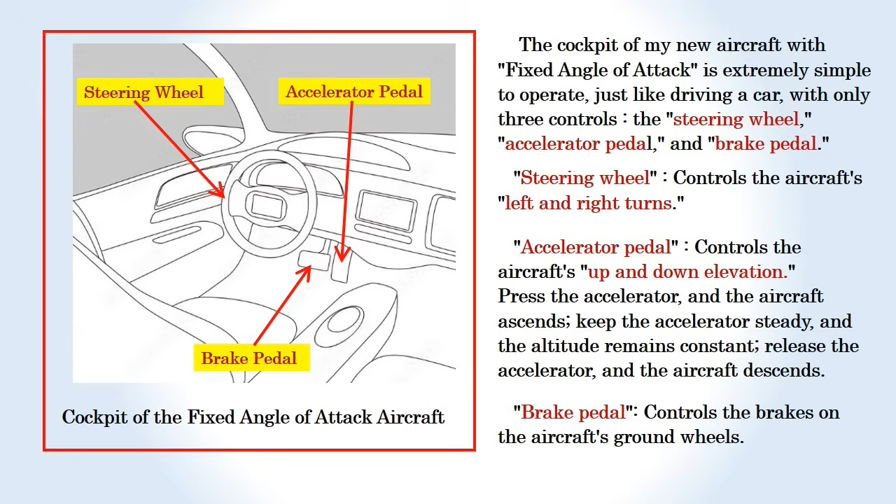This diagram shows the cockpit of the aircraft with fixed angle of attack. The cockpit of my new aircraft with fixed angle of attack is extremely simple to operate, just like driving a car, with only 3 controls: the steering wheel, accelerator pedal, and brake pedal. The steering wheel controls the aircraft's left and right turns. The accelerator pedal controls the aircraft's up and down elevation. Press the accelerator, and the aircraft ascends. Keep the accelerator steady, and the altitude remains constant. Release the accelerator, and the aircraft descends. The brake pedal controls the brakes on the aircraft's ground wheels.

My invented ultra-simple piloting aircraft is a major invention that can change the world. It is as easy as driving a car; anyone can operate it effortlessly. My ultra-simple piloting aircraft can, first, change the world's transportation from ground to air. Second, it can change the world's warfare—no need for ground forces, all become air forces.